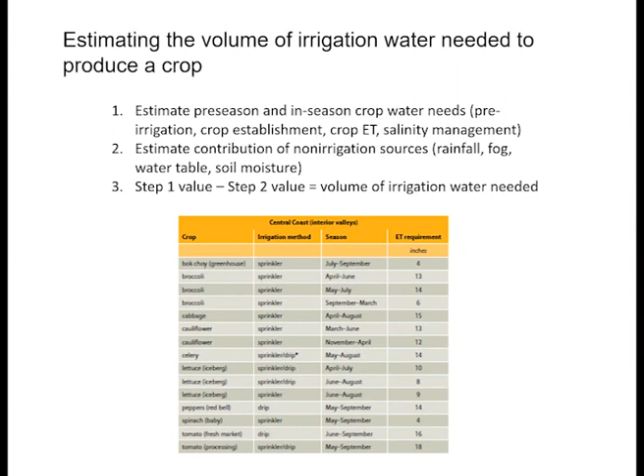You also want to estimate contributions from what we call non-irrigation sources. So it could be rainfall. If you're close to the coast, you might get some fog that contributes moisture to your crop, perched water table, or soil moisture that would be stored in the soil. And then you subtract the two, and that is the volume of irrigation water that you need to produce your crop.

So I'll just give you a quick example for a broccoli crop, and I'll use this example throughout the talk. So pre-season, we need about 2 inches of water just for pre-irrigation, so we can prepare the beds correctly. So you have to have some soil moisture there. And then after we transplant, maybe we apply 3 inches of water for that. And then in season, to satisfy the demand of the crop for evapotranspiration, we might have to put on about 20.6 inches. And so we sum that out, and it's a little over 2 feet of water that would be needed to grow this broccoli crop.

So one way of referring to this, I refer to inches or depth of water. Some people would say about 2 acre-feet per acre of water would be needed.

Now we could look at the non-irrigation sources. So we know there would be some soil moisture there before we plant the crop that we can take advantage of, and we might calculate that 1 inch available. And maybe early in the season we get a little rainfall, so we get at least 1 inch of that, and there's some fog near the coast, so we get about 1/10 of an inch. So we sum all that up, and that's 2.1 inches.

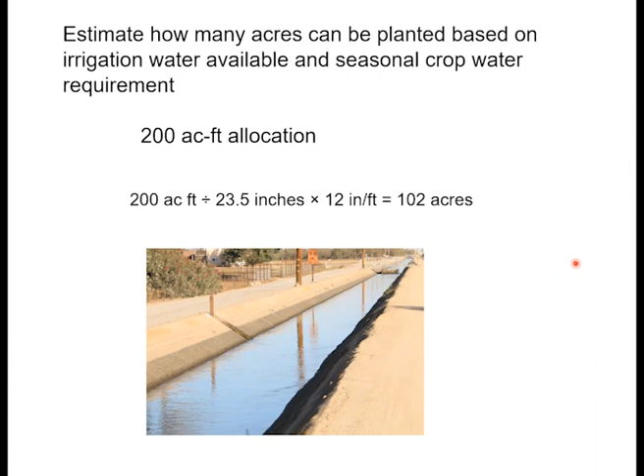That's a little more complicated to do this calculation if you're on a well. One reason is, you can't get all the water when you want with a well, because you're dependent on the flow rate. So we're going to do the same calculation where we have a well that produces 300 gallons per minute at 40 psi. And I want to just mention that every well has a performance curve. And so if you want the water at a higher pressure, you're going to be able to produce less water. So just keep that in mind.

And so one thing is if you're using, say, drip irrigation, we can go to a lower pressure and actually your well can produce more water per unit time than at a higher pressure. But we're saying 40 psi, so it can produce about 300 gallons a minute. And if you haven't done a pump test, I would urge you to do that, because that can give you this sort of performance curve that you can use to figure out, okay, how much water can my pump produce when I'm using sprinklers versus drip.

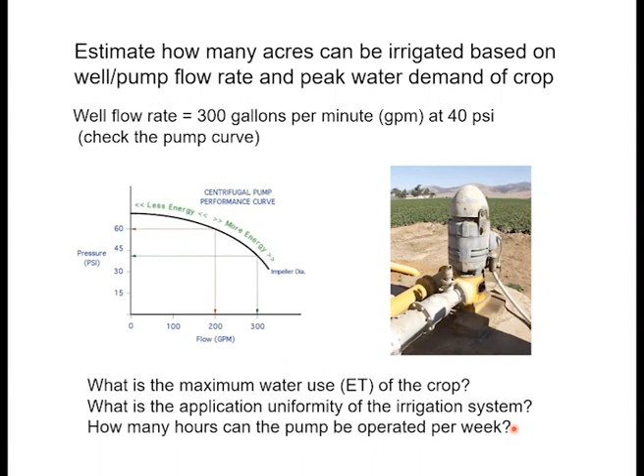So let's continue that estimate of how many acres could I irrigate at the peak demand, the time of the year when you're at peak demand for your crop. So your flow rate's 300 gallons per minute, and we might determine that at the hottest time of the year, your broccoli crop is going to use about a 1/4 inch per day. You're irrigating it with sprinklers, and so your application uniformity, let's say, is 75%. 100 is perfect, but you're getting, which is typical for sprinklers, about 75% uniformity. And you don't want to operate your well more than 12 hours per day and 6 days per week, because your staff take a day off.

So first, we calculate the water requirement, and that's a 1/4 inch per day. Now the plants don't take a day off, so it's 7 days a week they're growing. So if it was the hottest time of year, they're using a 1/4 inch a day times 7 days per week. And then we adjust for the uniformity of the irrigation system. And we need 2.3 inches of water per week per acre.

Now we want to convert that depth to gallons. And we do that by multiplying by this factor 27,154. That's how many gallons are in an acre inch. If you spread water over an acre, 1 inch deep, you have 27,154 gallons. So we can convert that to the gallons you need per week per acre, which is about 63,000 gallons for each acre of broccoli you're growing.

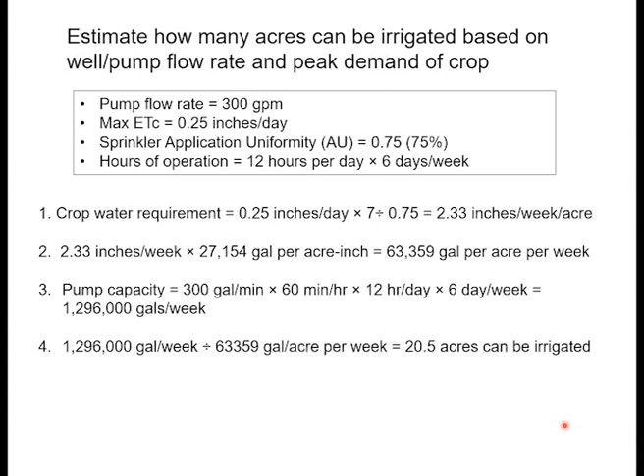So that's probably the most math I'll be doing in this talk, but this is sort of how you have to think about it when you're planning with a limited water supply. So what do you do if the water supply is not enough to grow crops in all your acres? As I mentioned before, you don't want to short the crop because it's going to suffer. You won't get good yield. You want to cut down the acres that you're going to cultivate.

Well, one thing you want to do is farm the best fields possible and grow the most profitable crops. So you look for the fields that have the most suitable soil types, maybe uniform and a shallow slope. They should be well-drained fields, the least weed pressure, highest fertility. So this is where your records are really, really important. Low incidence of soil-borne diseases, and you want to avoid fields where you have compaction zones, excessive slope, or maybe high salinity problems.

Then you might be able to be a little more profitable by selecting varieties that are higher yielding or shorter season varieties, so they don't use as much water. And you really want to optimize your pest management and fertility program. So again, for the land you have under cultivation, you're getting the best yields and quality possible.

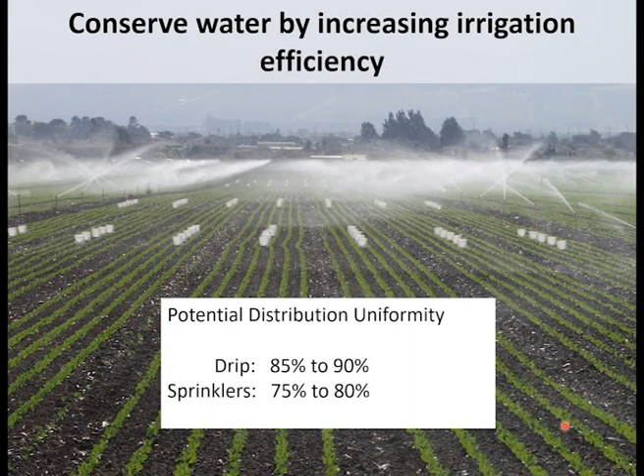With sprinklers, if 100% is a perfect uniformity, we usually can get 75 to 80% uniformity. With drip, we can usually get 85 to 90% uniformity. So it has a potential for higher distribution uniformity, or you could call it application uniformity. So drip has potential for high application uniformity, and it's very efficient for salinity management. You can inject fertilizer through the drip system. Because you're not wetting the leaves, often you get better yield and quality.

So this is another calculation, but a very simple one, just to illustrate how you can make that water go further by increasing your irrigation efficiency through improved application uniformity. So if you looked up broccoli in that table I showed earlier, it has a typical evapotranspiration demand over the season of just 13 inches. But say you're using sprinklers and your distribution uniformity or application uniformity is 70%, or in decimal form, 0.7.

And then you need a little extra water for what we call a leaching requirement, so salts don't build up, and say that's 10%. Then if we do this math here, you find out the water requirement for this broccoli crop is 20.6 inches. So that's where that 20.6 inches comes from that I was showing earlier in that assessment of the water needs for the season.

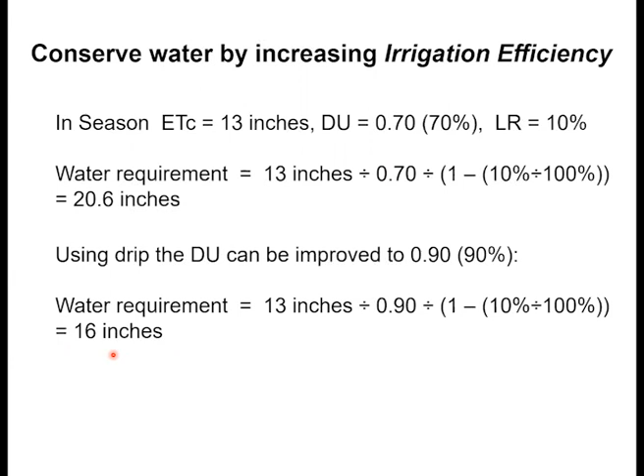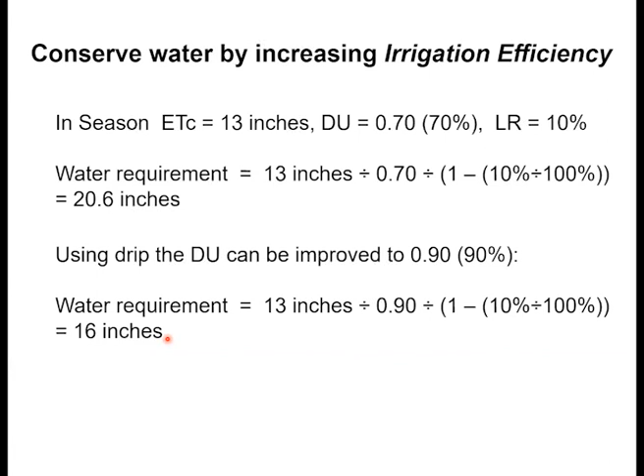Now, if we switch to a drip system that has a high distribution uniformity or application uniformity of 90%, then just by changing this one number from 0.7 to 0.9, we can get away with 16 inches of water. So essentially saving about 4.5 inches of water. So that 4.5 inches can go somewhere else in terms of your production.

So a 90% uniformity with drip is optimal, but the reality is sometimes growers don't manage their drip systems to take advantage of the potential uniformity. So it's very important to make sure whatever irrigation system you're using, you're optimizing its application uniformity. So fixing leaks; often drip is operated at very low pressure, but too low of pressure, and then the uniformity goes down. So you want to make sure you stay in that 8 to 10 psi pressure.

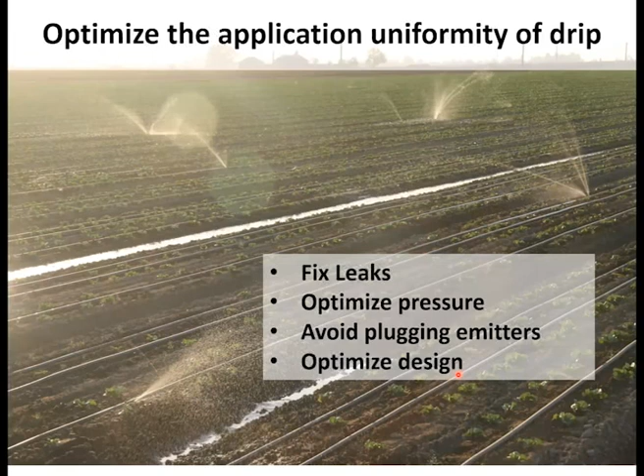If you're injecting fertilizer, especially organic fertilizers, you want to make sure you're doing that before filters so you don't plug up emitters, and you want to make sure the design is optimized to have very uniform pressure everywhere in the field. So pressure management is very critical to drip because you're operating the drip system at a pretty low pressure, where sprinklers would be at 45, 50, 60 psi. We're talking about drip systems that work optimally at 8 to 12 psi.

So you want to be able to check the pressure all over your drip system, and we can put pressure gauges, but I like using these Schrader valves and then checking the pressure with the same pressure gauge. It's sort of like comparing apples and apples, because you'll find these pressure gauges that you buy from the store vary, brand new, 2 or 3 psi from each other. So if you're talking about 2 or 3 psi of variation between gauges, and we're trying to keep the pressure at 8 or 10 psi, you already introduce some variability there.

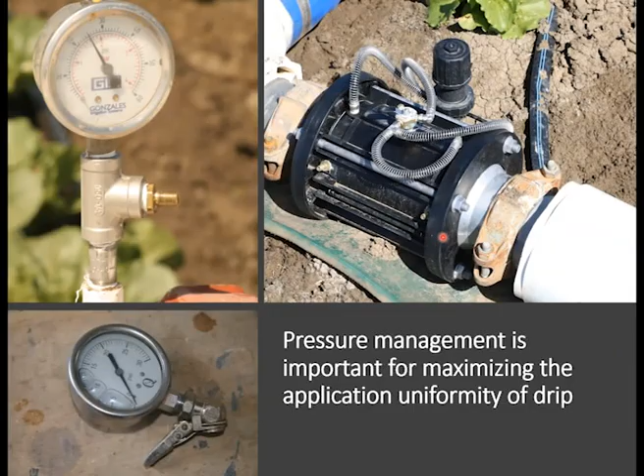Then with sprinklers, we also want to optimize uniformity. And one issue that we see a lot is the nozzle sizes either get worn or they're mixed of different sizes. And so the nozzle size or the orifice size has a lot to do with how much water comes out of each of those sprinkler heads. Again, pressure management is important for sprinklers. They often don't perform very well at too low of a pressure, and going to really high pressure is not necessarily a good idea either.

So you want to watch the pressure management, the lateral spacing. If you put your sprinkler lines too far apart, you lose uniformity. And also, obviously, operating them in wind, once you get beyond 5 miles an hour, you lose your uniformity. Now, there are sprinkler heads besides these brass impact sprinklers, such as these more modern plastic rotator sprinkler heads that can provide higher uniformity. And there's lots of different models now that you might want to check out.

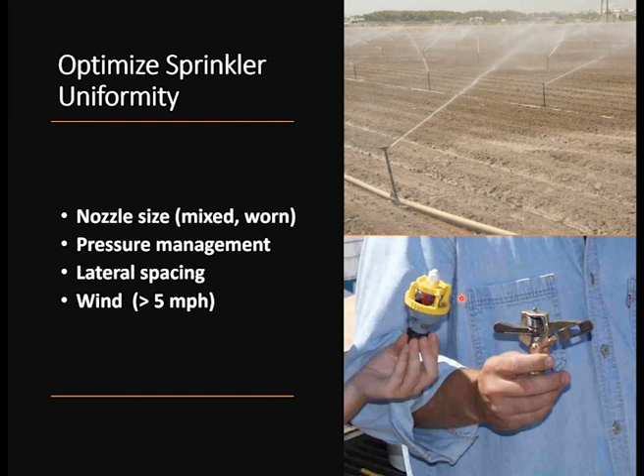So the other aspect to increasing irrigation efficiency is improving your irrigation scheduling to better match your applications with what the crop needs. And there's different approaches. We can use weather-based, plant-based, or soil-based. And ideally, you'd use a combination of these different methods.

I also think the problem with soil moisture sensors is they're pretty much in 1 or 2 spots in the field. So use a soil moisture probe and just feel the soil and probe around, especially with drip systems. Water doesn't go evenly from the drip line through the cross section of your bed. So probing around gives you a good sense of where the water is and how moist the soil is.

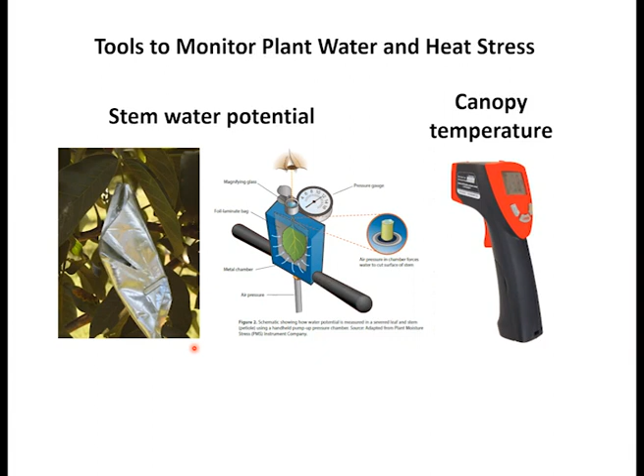And there's tools to utilize, checking the water status of your crop. For trees, stem water potential is a very good tool to use. It's labor intensive. For some of the agronomic crops, just looking at the canopy temperature can also tell you if the crop is under water stress. Neither of these tools are used much in vegetables, but for agronomic crops and tree crops and vineyards, they can be very useful.

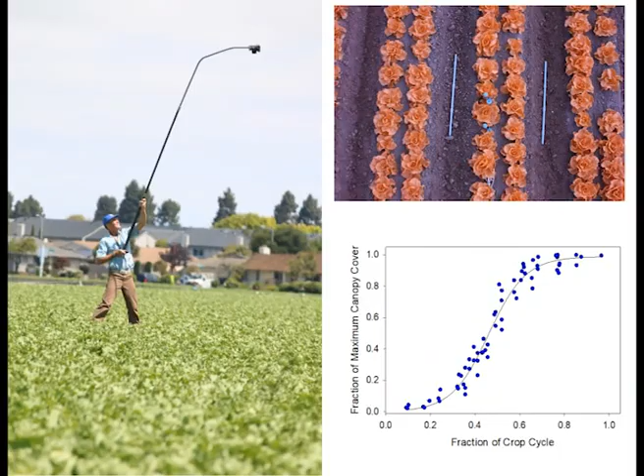We also, as Aparna mentioned, developed this online tool, CropManage, that can help you with irrigation scheduling. We've modeled the canopy cover development and the crop coefficient, so it will automatically pull in that CIMIS reference ET value and do all the calculations to tell you how long to irrigate.

How frequent to irrigate is going to depend on the weather, the ET demand, and the water holding capacity of your soil, the rooting depth or the volume of soil that the crop is exploring, and the threshold of when you are depleting the soil moisture to a point where you're stressing the crop.

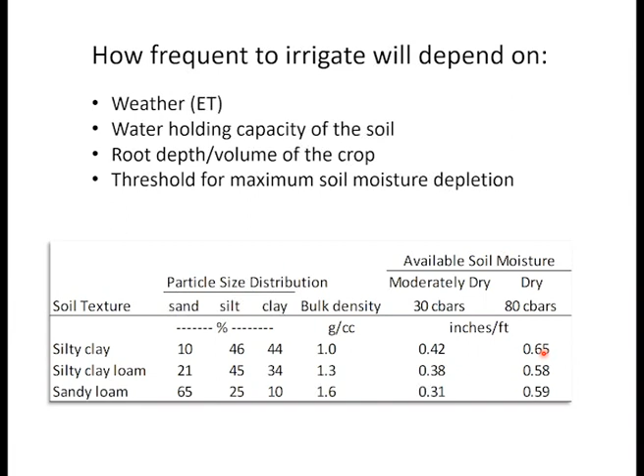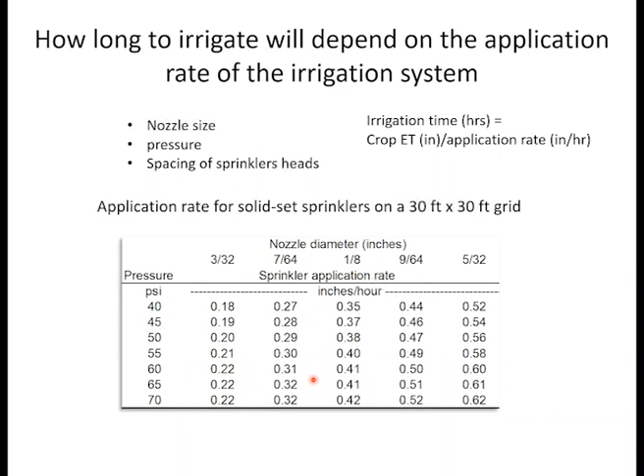Another way we can spread that water on more land and use it more efficiently is optimizing irrigations for establishing the crop. And so this is an area where I often see growers over applying water. When they first transplant or they just seed the crop, they put a lot of water on, and probably more than they need to.

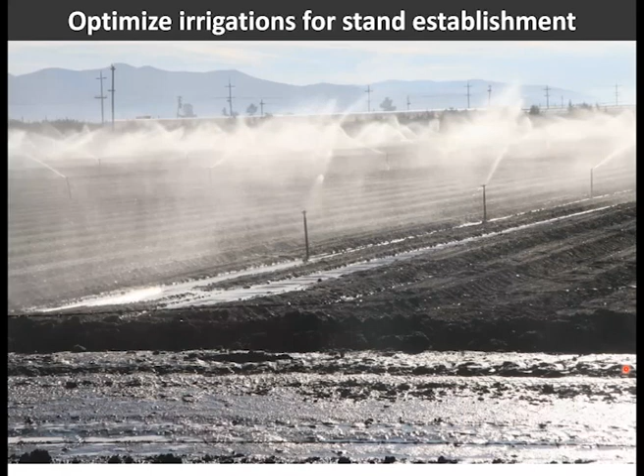So what you want to do is evaluate your starting soil moisture content before you start the first irrigation. And if the soil is very moist, you don't need to irrigate for 10 hours. So often, that first irrigation with a few hours with sprinklers, that's enough to wet that seed. And thereafter, you don't want to apply much more than twice the evapotranspiration, the reference evapotranspiration value for those days. So if it was a 1/4 inch a day of ET, you don't want to do much more than a 1/2 inch per day.

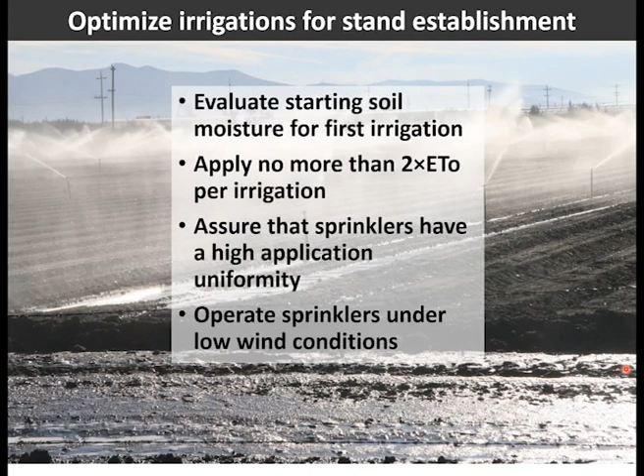And you want to make sure that your sprinklers or whatever irrigation system you're using has a high application uniformity. And if you're using sprinklers, irrigate under low wind conditions. Again, you can do a very short sprinkler irrigation, maybe just 1 hour each day, but make sure that 1 hour is the best hour of the day in terms of operating the sprinklers.

Then if you can maximize your soil's water holding capacity, also the rooting depth of your crop, you could take advantage of moisture that would be stored in your soil that's infiltrated during the winter period. And so growing cover crops, adding organic amendments, improve the porosity of the soil and its ability to hold more water. Also, if you have any impeding layers of the soil, the roots can't get down to that moisture. And so it is important to break up those layers periodically.

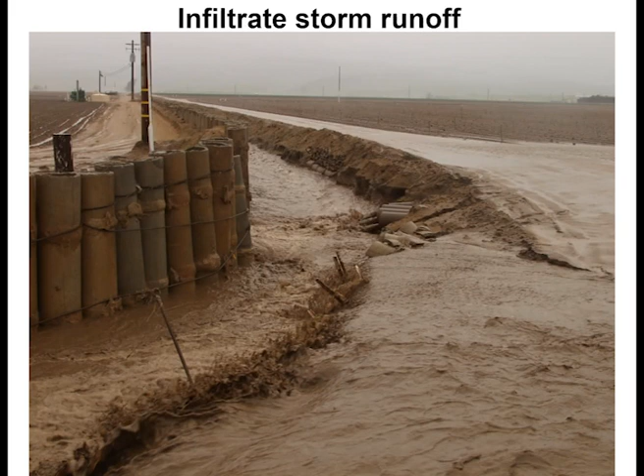So one of the water sources we do have are our winter rains, and sometimes we get the rain so intensely they just run off the fields and actually cause flooding downstream. The more of that water we can get into our soil, you have moisture for storage for your next crop in the springtime, but also you are infiltrating water back down into the aquifer. And unfortunately, where I'm located, historically, growers don't have a lot of winter cover crops in the ground. And so the soil sort of seals up like this and it runs off when it's raining.

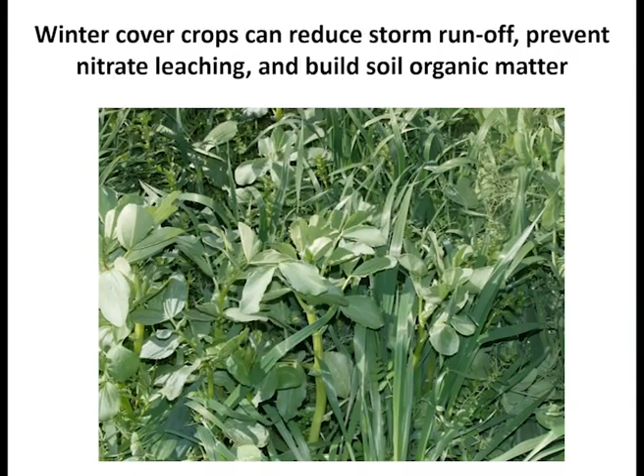So winter cover crops, of course, can help in terms of reducing stormwater runoff, as well as prevent nitrate leaching by taking up nitrogen that might be in the soil. And they build organic matter and improve the macropore structure of the soil, so you have more water holding capacity. But the reality is a lot of the vegetable growers want to get into their fields early in the season. So they don't want cover crops that are going to be difficult to incorporate.

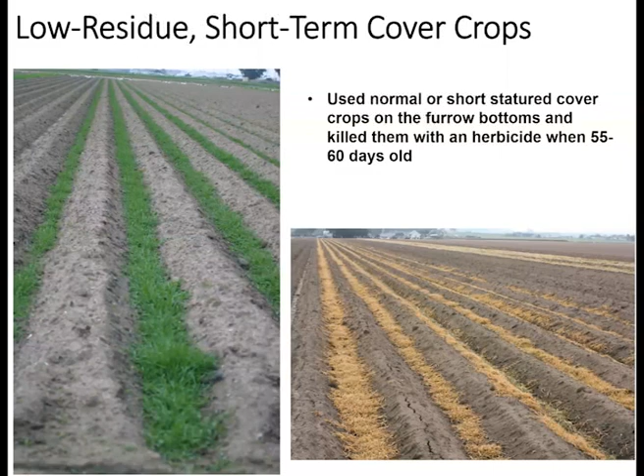So we have in the past looked at these low residue short-term cover crops. So we have peaked beds and we just plant in the furrows. And then for conventional farmed areas, we can put an herbicide on and kill that cover crop after 60 days. And we have this organic material on the surface, which can help reduce runoff issues. You could also do this organically. You probably wouldn't grow, say, this is a barley or triticale crop, but we found with some of the mustards, you could kill those mechanically and use that residue on the surface. And that residue breaks down over time. But what we noticed was it really helps infiltrate moisture into the ground during these rain events.

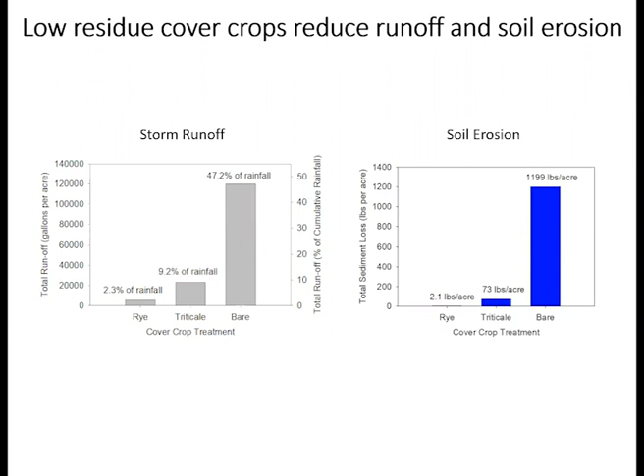Lastly, I just want to mention that you have to think long-term because we're in an area where droughts are reoccurring for developing and using alternative water sources. So on the coast, we've developed this recycled water supply. So we're using the sewage water from the urban areas and it's going from secondary to tertiary treatment and distributed through what we call the purple pipe to growers. And on the Central Coast, this irrigates about 17,000 acres now. So a lot of growers are utilizing it, and it takes a little while to understand its limitations because it does have higher salinity. It has higher nitrogen content than maybe their well water.

And then other growers are capturing their tailwater during the irrigation season and putting it into these retention ponds. And the idea is then they can reuse that water for germinating up their crop or for pre-irrigation. They don't use it for leafy greens during the season because they're concerned with food safety. And they also do a treatment of this water with chlorine to make sure they don't have any pathogens that would cause harm to humans.

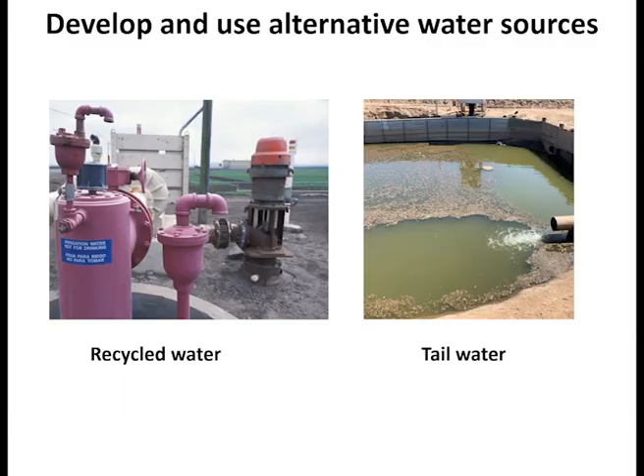So I'm going to wrap this up by just summarizing. Our main water conservation tips are, again, assess the crop water needs, maximize the production and profitability of what you do grow. Do whatever you can to increase your irrigation efficiency so you can spread that water over more land. Improve the water holding capacity of your soil. Make sure you're doing whatever you can to infiltrate winter rains, and look long-term for developing and using alternative water supplies.